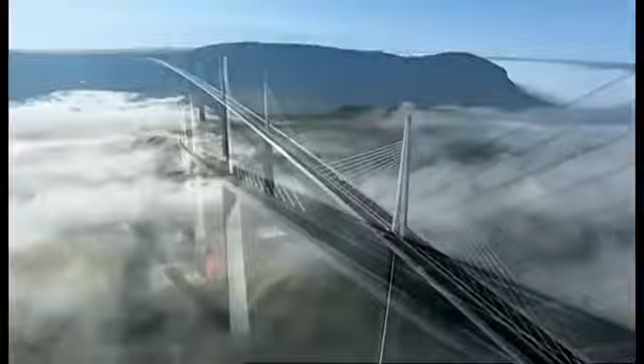This is the Millau Viaduct, the tallest bridge in the world. Its highest tower stretches a staggering 343 meters. So high, the bridge glides above the clouds. But this is a megastructure they said couldn't be built. When I first showed the drawing of this bridge, they really thought I was crazy.

The team attempting to build this amazing freeway in the sky had to survive landslides, fight winds gusting at 130 kilometers an hour, and weather massive storms as the bridge simply hung in the balance. It's a bridge that pushes the boundaries of engineering to the limits, and then beyond.

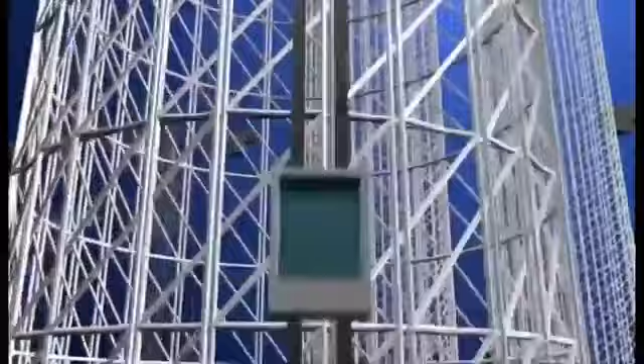Imagine building a series of Eiffel Towers, then slinging a 4-lane highway between them, all the way across one of the deepest valleys in France. Impossible though it sounds, that pretty much describes the building of the Millau Viaduct.

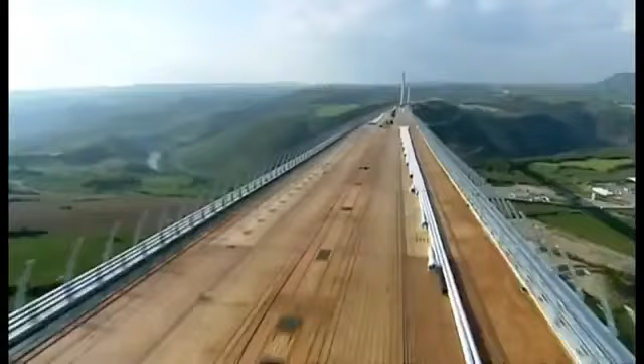From the start, the construction team faced 3 daunting challenges. 1. Build the tallest bridge piers in the world. 2. Put a 36,000-ton freeway on top of them. And 3. Erect 7 steel pylons, each weighing 700 tons.

And what's more, they had to do this hundreds of meters above solid ground. So high that if you were on top of the Eiffel Tower, you'd still be looking up at this awesome bridge.

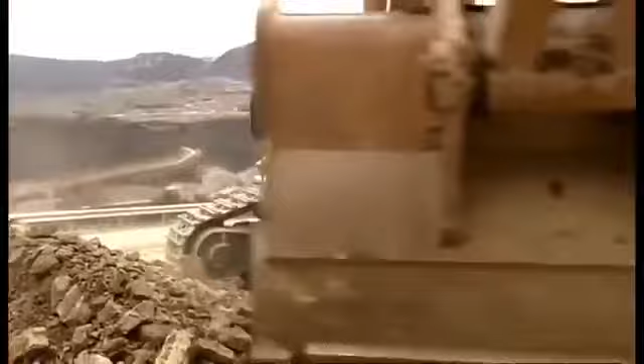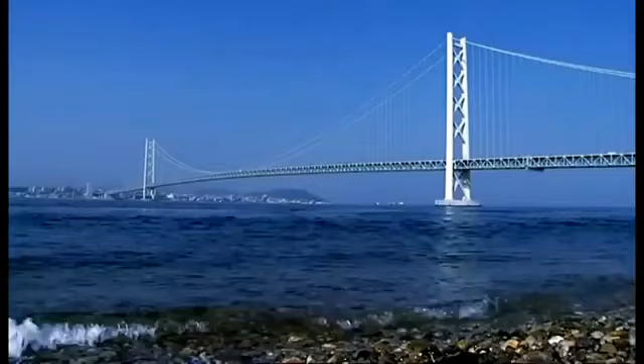October 2001, the team break ground. They're required to build a bridge that'll last for 120 years. And to win the contract, the team promised to build it in record time, less than 4 years. By comparison, the world's longest suspension bridge, the Akashi Kaikyo in Japan, took a full 10 years to build.

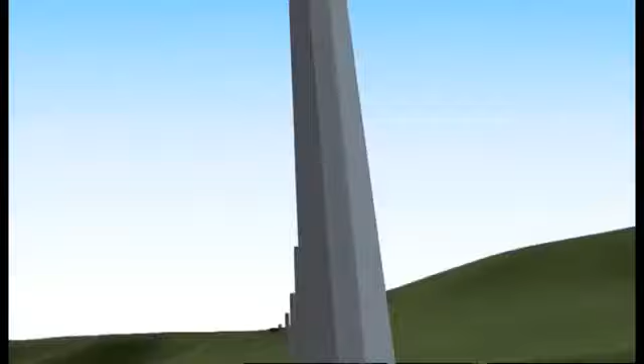To up the ante, any delay will cost them $30,000 a day in penalties. There are 7 piers that are numbered from the northern end of the valley. Number 1 will pose problems because of the steep slope. Number 2 will be the biggest challenge since it's the tallest. Crossing the river, number 3 is not much shorter. Then 4, 5, 6, and 7 climb the gentler slope to the south.

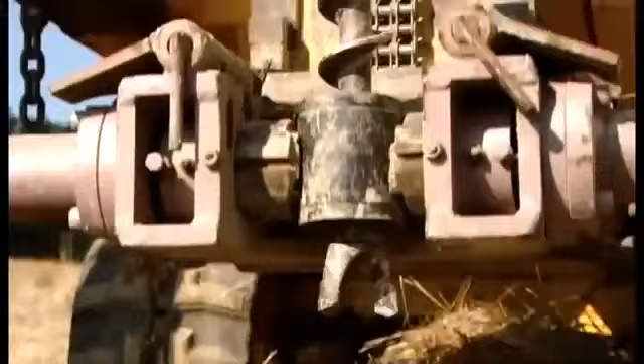To begin, the team had to bury the foundations deep in the bedrock in order to support the enormous weight the bridge will place on them. But the forces of nature were stacked against them. Geologists have warned of the risks posed by the region's fractured limestone. The rock is full of cavities that are essential to the local cheese economy.

These cave systems, close to Millau, are home to a unique bacteria responsible for the blue mold in the world-famous Roquefort cheese. But what's perfect for cheese could be disastrous for a megastructure. The geologist's diagnosis spelt one thing: landslides. This kind of catastrophe could jeopardize the entire project. Despite the warnings, building went ahead as planned.

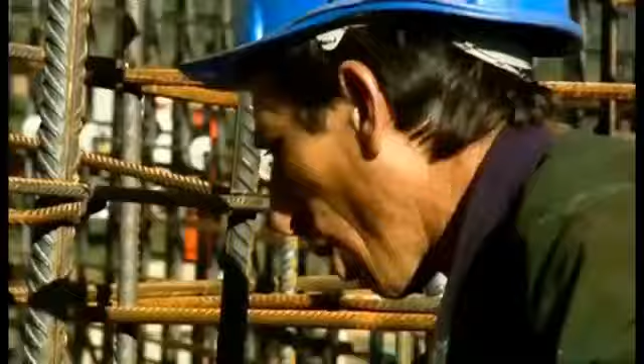Then, well into construction, as predicted, a dramatic storm causes a landslide. 4,000 cubic meters of rock collapse around Pier 1. Fortunately, the fallen rock doesn't damage the pier, but the warning is clear. They're forced to divert precious manpower and equipment to stabilize the slope and prevent a repeat collapse.

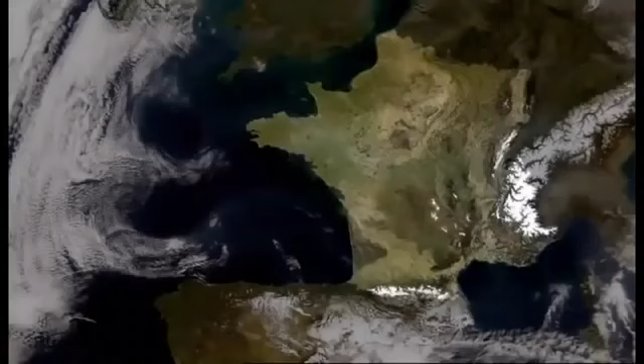So if the area is prone to landslides, why did they build the world's tallest bridge here in the first place? The answer is simple. In the 1980s, France built a freeway linking Paris directly with Spain. This major artery headed south across the French countryside, while from the Mediterranean, the freeway headed north, until they both hit one of the deepest valleys in France and stopped dead.

Welcome to Millau, France's least favorite bottleneck. The town of Millau is in the mountainous region of the Massif Central, one of the most tranquil parts of France. But in summer, this poor medieval town suffered traffic hell. The locals couldn't take it anymore. Neither could their mayor.

It was terrible for our reputation. When you hear every day on the television and radio, avoid Millau, there's a traffic backup, a 5-hour wait in Millau.

And it's not just the people of Millau. Two drivers, crossing the 30-odd kilometers between the freeway on either side of Millau, reveal exactly why this bridge is needed. The driver in car 33 will cross the new bridge, while in car 22, the other will take the old road across the valley floor.

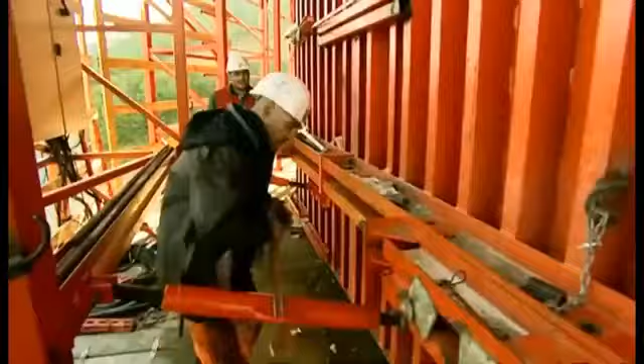The Millau Bridge would not only be the world's tallest, it would be unlike any bridge ever constructed. When I first showed the drawing of this bridge to the authorities, they really thought I was crazy. Virlogeux's Normandy Bridge has 2 sets of cables supporting the deck. But he wanted to up the stakes for Millau by losing 1 row of cables, so the remaining line would be forced to do twice the work.

More dramatically, the 2.5-kilometer Millau Bridge, instead of having a single main span, needed a whole series of piers to support it across the valley. No bridge builders had ever attempted a multiple-span, single-line cable-stay bridge on this scale before. The French authorities had a problem. Nervous about Virlogeux's groundbreaking scheme, they held a competition inviting other engineers and architects to compete with different designs.

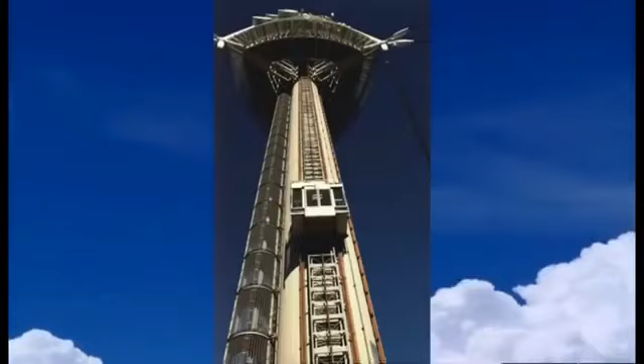The winner, Lord Norman Foster, is one of the world's superstar architects. In Hong Kong, he built the world's largest airport terminal. In Barcelona, offices literally hang from a mast on his communications tower. This is a man who regularly contemplates the impossible and delivers. You know, it's the challenges, and it's one challenge on top of another, on top of another.

And with Millau, one of the biggest challenges was making it fit into the landscape, given it's just down the road from the famous Gorges du Tarn, France's equivalent of the Grand Canyon. How do you make something which has to be so immensely strong against the forces of nature look very gentle, very delicate? How do you weave something on that scale into the most unbelievable landscape?

Ironically, Foster's answer was to take Virlogeux's pioneering scheme, then push it one stage further. He turned an elegant piece of engineering into a delicate work of art by boldly cutting out 2 of the 9 original piers and seriously slimming down the remaining piers and road deck. Foster wanted the bridge to appear as delicate as a butterfly, but this butterfly has to support the weight of 5 Eiffel Towers in gale-force winds hundreds of meters above the River Tarn. Getting the design wrong would be a disaster.

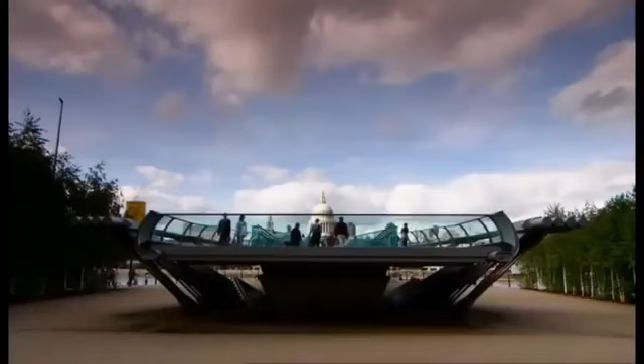Then, with Millau still on the drawing board, Foster's record as a bridge builder suffered a major setback. His Millennium Bridge in London is actually another record-breaking structure, the lowest profile suspension bridge in the world. But when this footbridge opened to the public in June 2000, it was a public relations disaster. Crowds walking over it set up a resonant frequency, and the bridge began to sway. As people adjusted their step to the small initial wobble, the effect was magnified.

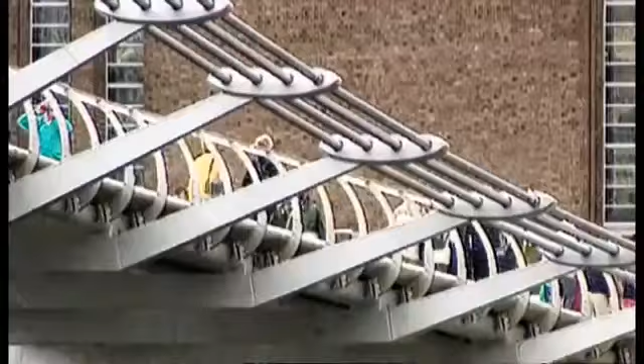Though it didn't threaten the structure, the swinging motion became so dramatic, the authorities closed the bridge for a refit that took 1.5 years and ended up costing over $8 million. It was a bad omen for the Millau Bridge, where construction was soon to begin. And at 15 times the height, a design flaw would be a catastrophe.

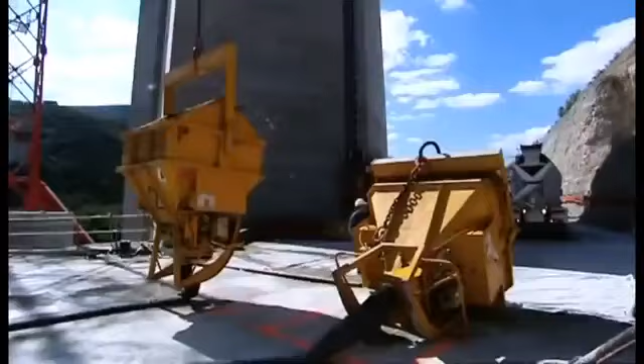December 2001, France's Millau Viaduct, the tallest bridge in the world, is under construction. Everything about this project is supersized. It'll need 200,000 tons of concrete, so much that the team have to build a concrete factory on site. But there's nothing straightforward about this concrete. The formula must be just right. It needs structural strength to support the massive loads it'll have to bear. But it can't set too quickly, as it has to be hoisted into position and poured hundreds of meters in the air. And it needs to be just the right color to suit Norman Foster's vision.

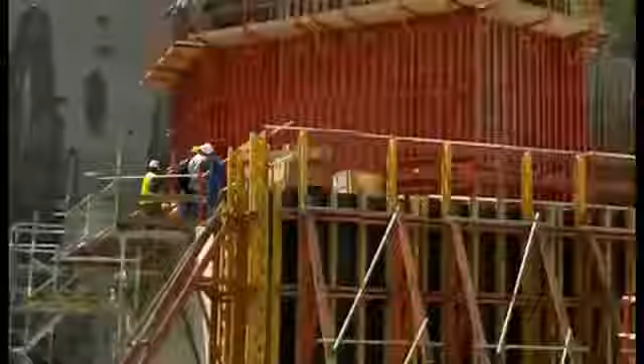In fact, the architect's vision has created a headache for the construction team. He's designed each pier as a complicated geometric shape, tapering the entire way up with vertical grooves set into them to create shadows. But what's just a line on paper for the architect was a major challenge to build. The enormous piers are built step by step by pouring concrete into a temporary mold.

To give the required strength, the molds are filled with a frame of steel reinforcing bars. In total, 16,000 tons of these steel bars are hoisted into place and secured. Laid end to end, they'd stretch the 4,000 kilometers from Millau all the way to Central Africa.

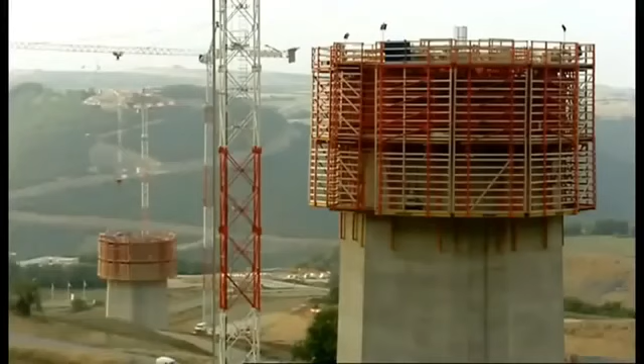The shape of each pier is seriously complicated. As a result, each time they remove the sections of red steel shuttering, they have to change the shape of the mold to fit the profile of the next 4-meter section. Manhandling these steel panels, weighing up to 15 tons apiece, is no picnic. And with the combined height of the 7 piers totaling well over 1 kilometer, they have to change the shape of the mold over 250 times.

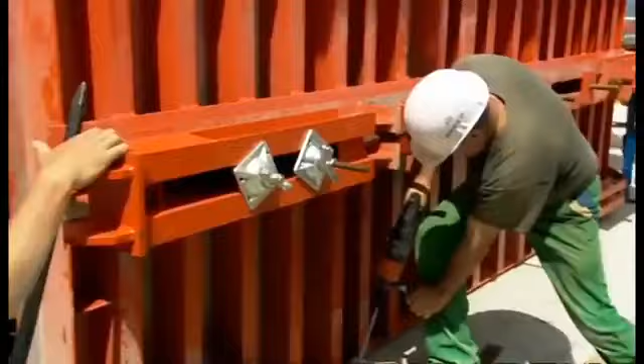Every 3 days, each team on each pier went through this whole cycle. Then they repeated the process. But it was a race against time, with a permanent threat of delay. Keeping the entire build on time and to budget was the daunting responsibility of one man, Jean-Pierre Martin.

If instead of 3 days we took 4, imagine that multiplied by the number of castings. We'd end up with a 3 or 6 month delay. With a penalty of nearly $1 million a month, this isn't something Martin wanted to contemplate. And this schedule wasn't his only headache.

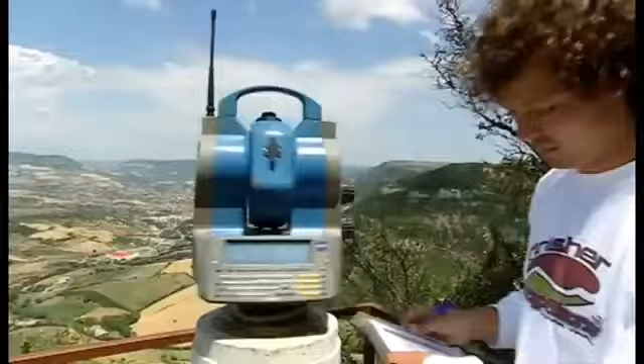You have to be pinpoint accurate when you're building the tallest bridge piers in the world. Get it wrong, and the bridge simply won't fit together. Just 10 centimeters out, about a hand's width on each 4-meter section, and the tallest pier could be 6 meters off at the top, the width of a jumbo jet fuselage.

Each team was aiming for a specific point in the sky. For Pier 2, this was exactly 245 meters above the ground, 546 meters from the north side, and 1,914 meters from the southern end. There was no room for error.

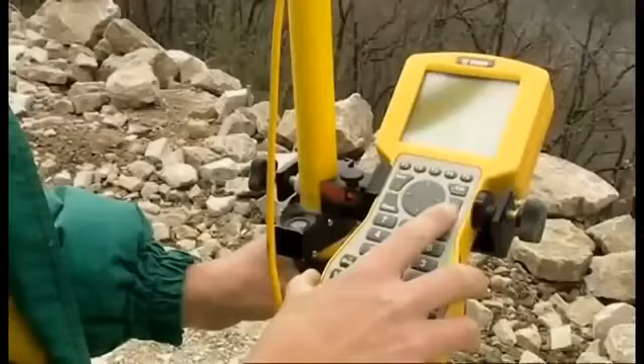The only chance they had to get it right was with GPS, accurate to within 4 millimeters. Using signals from multiple satellites, the team could pinpoint their position and make sure they're on target for that critical point in the sky they needed to hit.

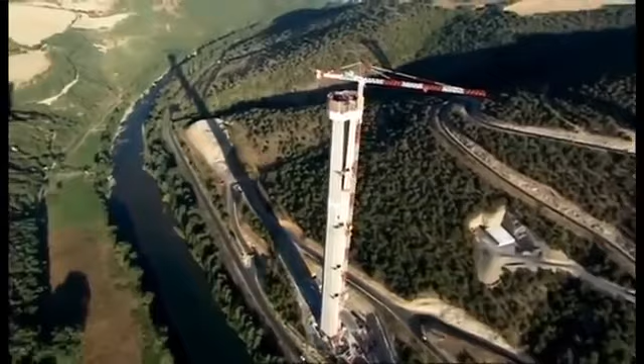Month after month, the piers climbed higher. Finally, by November 2003, they reached their full height. At 245 meters, Pier 2 becomes the highest bridge pier in the world. But is this record-breaking pillar where it's supposed to be? Amazingly, it's dead on target, to within 2 centimeters. Champagne corks pop. It's time for a major celebration.

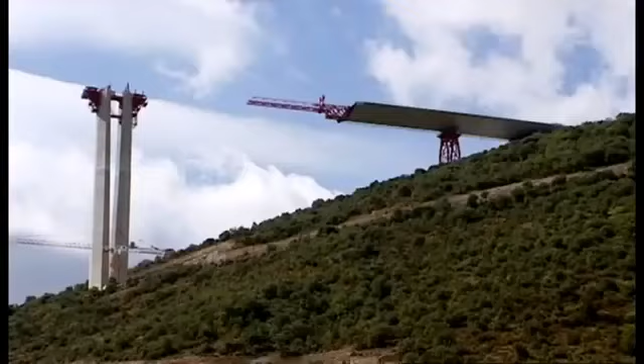Against all the odds, they were 1 month ahead of schedule, but the team couldn't afford to relax. The next stage of the project would be the most difficult part of the build. Phase 2 of building the world's tallest bridge involved putting a 2.5-kilometer roadway weighing 36,000 tons on top of the piers, a full 270 meters above the River Tarn.

Bridge builders know danger comes with the territory, but working at these heights can be lethal. More than 34 died constructing New York's Brooklyn Bridge. 35 died in 1970 on the Westgate Bridge in Melbourne, Australia. And 1 year later, 13 workers were killed when the Koblenz Bridge in Germany collapsed into the Rhine.

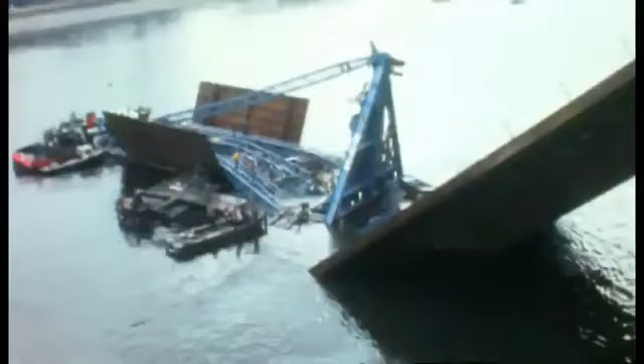With these fatalities in mind, the team decided to fabricate the entire road deck on the safety of solid ground. This meant building it in steel, which in theory would be much safer than lifting vast concrete sections hundreds of meters into position. There's only one problem with this plan. No one had ever put a road deck on piers anything like this height before, let alone over a 2.5-kilometer span.

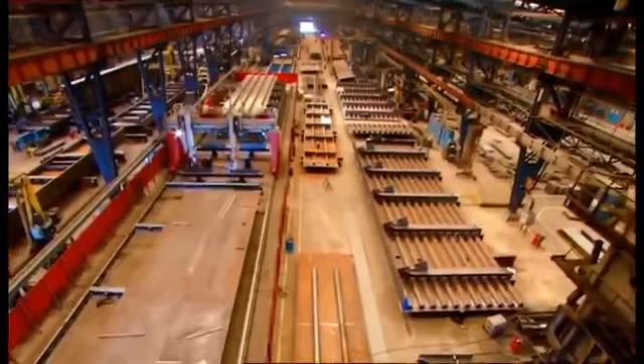In the end, only one steel manufacturer had the courage to take on this colossal challenge. Eiffel, the steel firm set up by the great French engineer. Eiffel built what was once the tallest bridge in the world, the Garabit Viaduct in southern France, before getting round to the framing for New York's Statue of Liberty and, of course, his signature tower in Paris.

But despite the company's experience, Eiffel's director, Marc Buonomo, knew he was taking a serious risk. It was a gamble for the company, because if there had been a mistake, if it hadn't worked, it would have been the whole company.

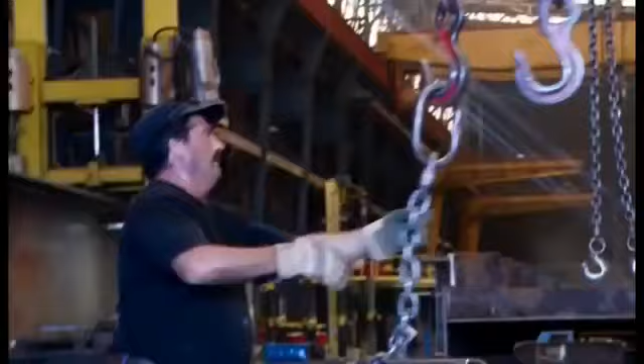They fabricated the massive sections that would make up the road deck in the company's steel factories. This immense jigsaw puzzle involved manufacturing 2,200 separate sections, weighing up to 90 tons, and some of them 22 meters long. Their accuracy is measured with a laser to within a fraction of a millimeter.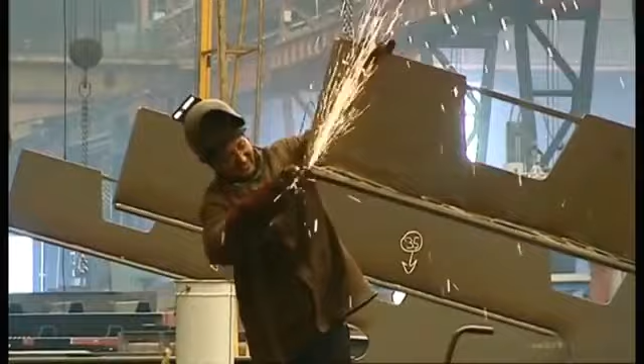The huge square tubes are the central spine that should make the deck rigid. The triangular side panels will be welded on either side to create the width for a 4-lane highway. To meet the punishing schedule, Buonomo automated the manufacturing with a 2-headed welding robot and a plasma cutting machine.

Each cutting pattern or template is programmed into the computer. Then the machine automatically blazes its way through the steel. The torch reaches a scorching 28,000 degrees centigrade. That's 5 times the temperature of the Earth's inner core. But cutting and welding was the easy part.

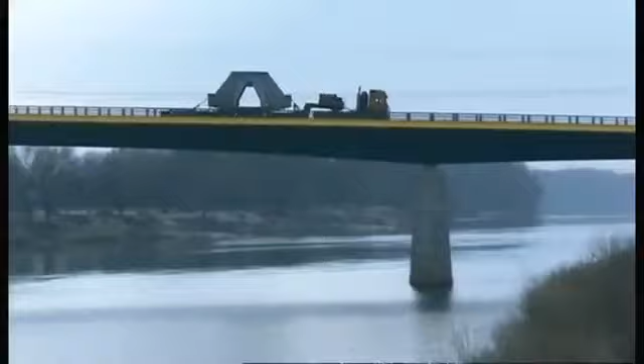The hard part was getting these monster sections the hundreds of kilometers from the factories to Millau. The routes had to be planned with precision to avoid major damage. The police coordinated safety and clearances. Even with that level of preparation, some obstacles felt as if they're cutting it just too close for comfort. And this was no one-off event. To build the viaduct took over 2,000 of these extraordinary road convoys.

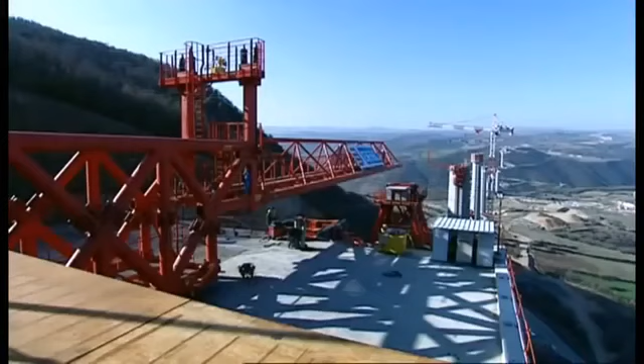The components arrived at assembly plants set up, one on either side of the valley. Here, the pieces of a massive jigsaw puzzle were welded together to form the 2 halves of the deck. But getting these 2 halves to span the valley on top of the world's tallest bridge piers would be a major challenge. They'd be the first team to put a road deck on a pier taller than an 80-story skyscraper.

And pushing bridge building beyond anything attempted before, they planned to slide the entire 2.5-kilometer road deck over in 2 colossal pieces. The bridge's chief engineer, Jean-Marie Cremer, was one of the few people who believed it could be done. All the engineers who know this method, who were in the know, didn't believe it was possible. If the team had got their calculations wrong, the entire structure could collapse into the valley.

We found a solution for the construction, which was to launch the bridge from the 2 sides. One part on the Larzac Plateau, one on the Rouge Plateau. And to push them from the 2 sides and to make them come and meet here above the River Tarn.

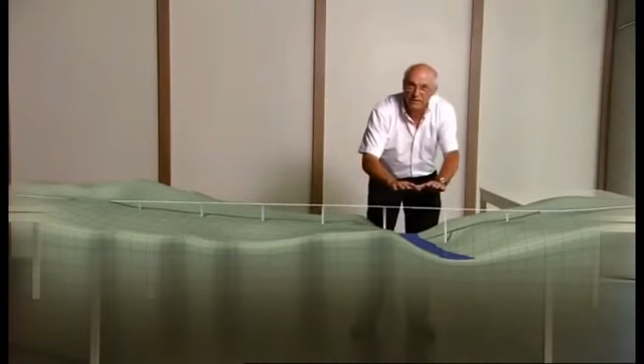Smaller bridges use a similar technique. A powerful set of hydraulic rams literally pumps the deck from one side to the other. But Millau would be the longest launch ever attempted over the highest piers in the world, and the results could spell disaster. The deck is so slender, it would bend and collapse if it were pushed out over the 342-meter spans between each pier. The furthest anyone's previously managed is less than half that distance.

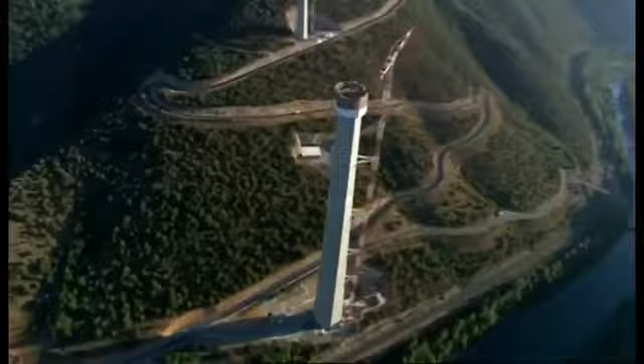The first part of the solution was simple. Fit a pylon so its cables support the front of the deck as it goes out over the valley. Then construct temporary steel support towers that halve the spans to a more manageable 171 meters. These steel towers were a construction feat in themselves. The largest, over 170 meters high, is the tallest ever built, and they needed to carry a massive load.

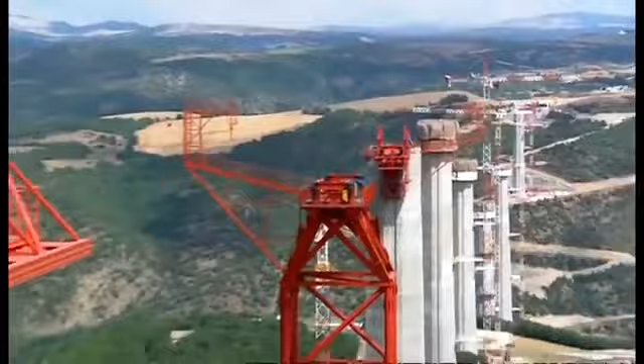7,000 tons as the leading edge of the deck, together with the first 90-meter pylon, slide over. And simply pushing this enormous weight over the top of the vulnerable piers would bring them crashing to the ground. This was the nightmare scenario. If we'd done a conventional launch, we would have knocked the piers over like the pins in a bowling alley.

Someone needed to reinvent the way this type of bridge is built. And it's Marc Buonomo with Jean-Marie Cremer who came up with the breakthrough. The basic principle can be demonstrated with a heavy box and a wobbly table. With a normal launch, you knock over the piers. I want to advance the deck over the pier, but if I push the deck from here, I'd knock over the piers, because they're so tall.

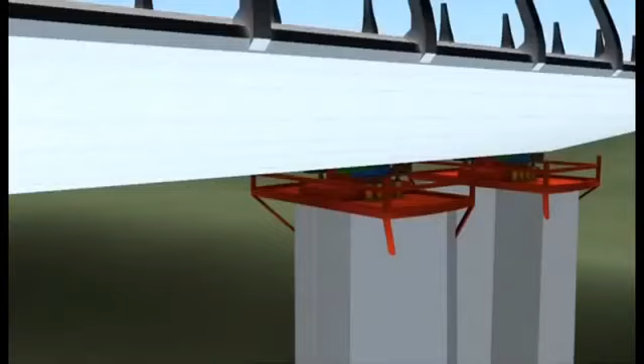The idea is to install a launching system on top of the pier, and that way, if I push the deck, it has no effect on the stability of the piers, and the piers won't fall over. The trick is to use a series of these launching systems to jack up the deck and inch it forward. Each system uses two wedge-shaped blocks under each side of the deck. The upper wedge is pulled forward by a hydraulic ram.

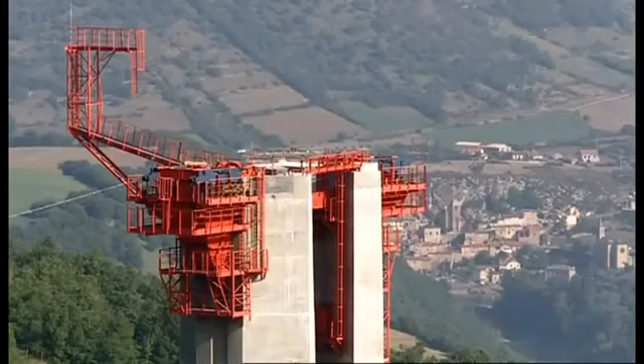It slides up the slope of the lower wedge at the same time, lifting the deck from its supports and advancing it 600 millimeters. The lower wedge then retracts, dropping the deck onto its supports. The upper wedge returns to its original position, and the whole cycle begins again. 4 of these clever devices are placed on each pier, all programmed to work at exactly the same time. The result is that together, they pick up the entire roadway and shunt it forward.

But if one fails or gets out of step, it could spell disaster. The force could push the bridge piers apart till they collapse. When you're up there and you see Millau 300 meters below you, you ask yourself, was this a good idea? The future of the entire project was now hanging on a prototype, and it had never been tested.

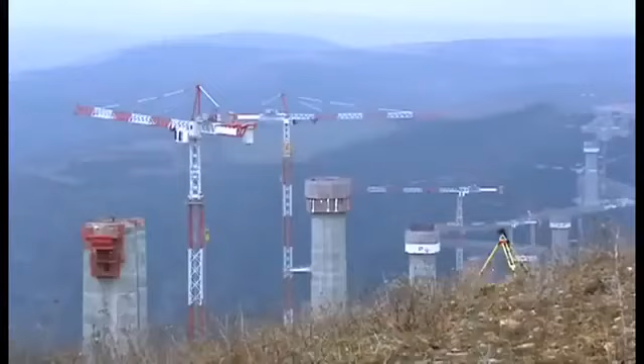It's the morning of February 26, 2003. Do or die day for the world's tallest bridge. Everything is about to be put to the test. The flexibility of the deck, the strength of the temporary piers, and critically, the pioneering hydraulic ram system. Even Buonomo, the man in charge of the launch, had his doubts. As it had never been done before, I have to tell you, I had fears that it wouldn't work.

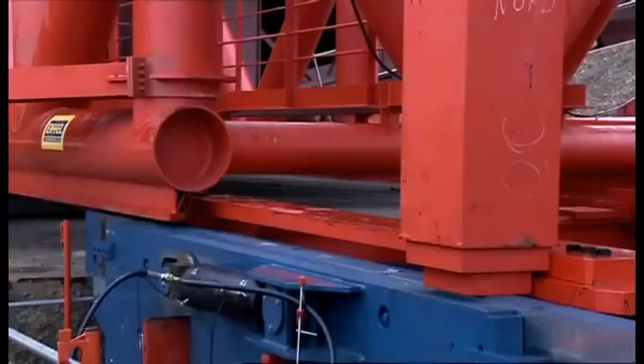The pumps kick in, the pistons start to push, and the deck begins its huge journey across the valley. The moment I heard the motors start, I put my finger on the deck, and I could feel my finger move. Every 4 minutes, the deck advanced 600 millimeters across the valley. Surveyors tracked its progress. But it was still a nail-biting time as they watched the unsupported deck crossing the void.

Eventually, the deck reached the safety of the first pier. 204 meters down, only 2,256 to go. The launching system seemed to be working as planned. The engineers were feeling optimistic.

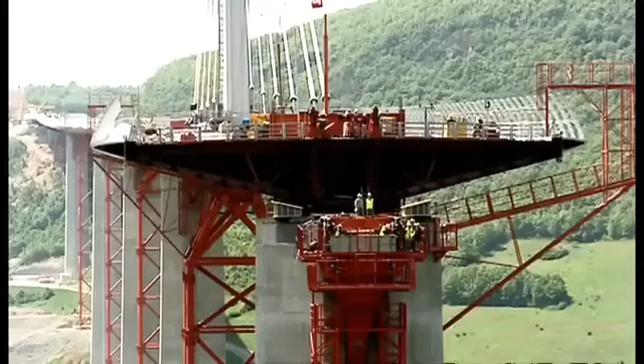But as the deck advances into space, it'll become more vulnerable to the wind, which can reach 130 kilometers an hour. Unfortunately, the road deck has the shape of an upside-down airplane wing, and the team's greatest fear is that this wing could simply take off.

The engineers kept a close eye on the wind and weather conditions. When they were satisfied there was a 3-day weather window and the wind wouldn't exceed 85 kilometers an hour, they'd give the construction team the go-ahead, and the deck launch could continue. The reason for this precaution is simple. Strong winds can literally tear a bridge apart.

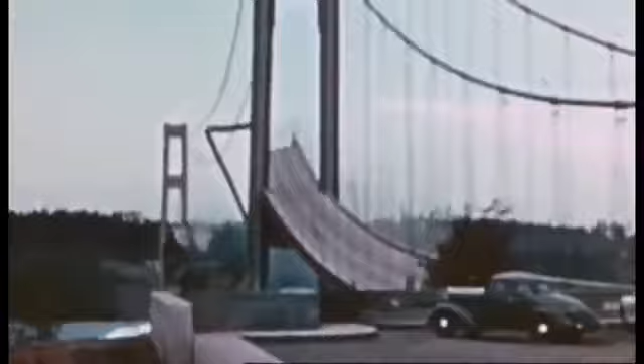In 1940, Washington State built a suspension bridge across the Tacoma Narrows in the US Northwest. It opened with a grand ceremony on July the 1st. But the celebrations were short-lived. The bridge had a major problem: the wind. Girders beneath the deck, designed to make the bridge rigid, actually blocked the wind, causing the roadway to ripple alarmingly. Locals soon dubbed it Galloping Gertie.

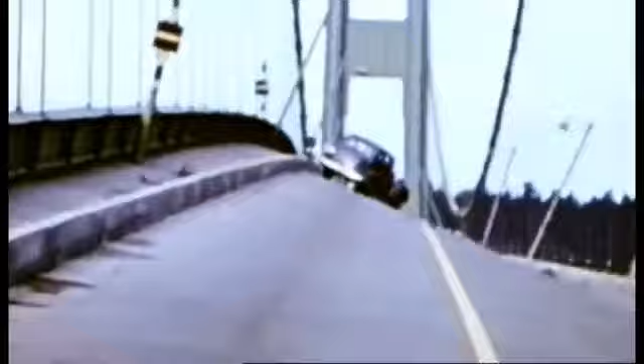On the 7th of November, with the wind less than 70 kilometers an hour, the bridge begins to twist violently. At 11 a.m., time runs out for Galloping Gertie. The wind sends the bridge crashing into the river.

Wind tunnel testing is now standard procedure as a direct result of Galloping Gertie. For the Millau Bridge, they analyzed the wind in the Tarn Valley over 18 months, then recreated those conditions in the wind tunnel. Wind engineer Olivier Flamand was shocked by the results. The average wind speed was relatively low, but because there's such strong turbulence, it created very fast peak winds.

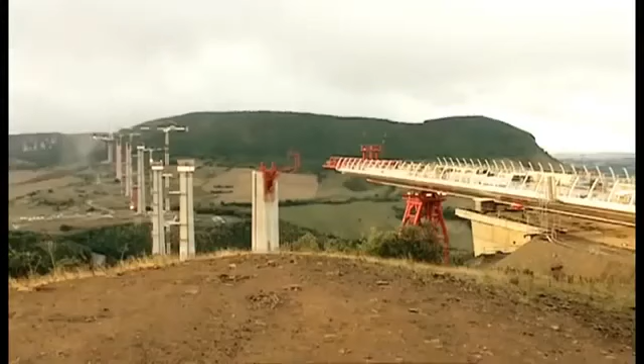The rugged terrain creates serious turbulence at the height of the road deck. Winds peak at 130 kilometers per hour. That's hurricane force. They tested every aspect of the bridge to analyze the risks: piers, pylons, and critically the deck. But it's not just the aerodynamics of the finished bridge. They needed to find out how it would behave when it was most at risk, during the launching of the deck.

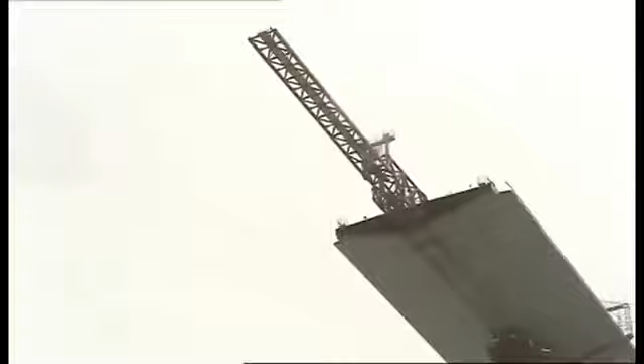Olivier and his team reached a chilling conclusion. The winds they've measured are strong enough to blow the unsecured deck off its supports and send it crashing hundreds of feet to the valley floor. And then the nightmare began. On the 22nd of August 2003, 6 months into the deck launch, one of the launch systems failed, leaving the deck hanging in the wind. To make matters worse, the weathermen were predicting storms.

So far, these massive pumping machines had worked perfectly. But the fact is they were prototypes, and due to the frantic schedule, they'd never been tested. The problem was that the non-stick Teflon between the sliding surfaces had ripped, and the friction generated was too much for the hydraulic rams to push against.

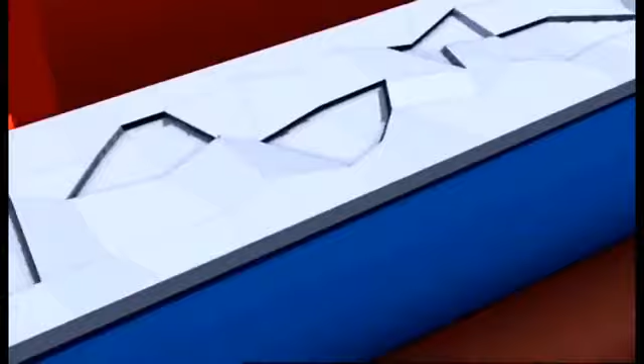Unfortunately, no one had planned on replacing parts of this monster machine mid-launch on the top of a massive concrete pillar. This was very bad news for the man who staked his reputation on this system. It was maximum stress, like poison in your mouth. You don't forget that.

Re-examining their calculations, they realized the cause of the problem. They'd underestimated the forces between sliding surfaces, but they wouldn't be able to repair it without the necessary spare parts. The clock was ticking, and Marc Buonomo needed a solution fast. When Apollo 13 came back with that incident, the NASA engineers requested they did the inventory of everything there was on board to know how to fix it.

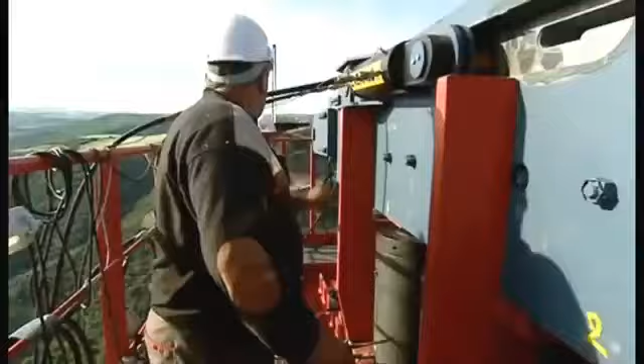The Millau team did an inventory. They realized that the other launching machines, not yet being used, could be stripped to provide the new Teflon surfaces they needed. Working all through the night, the team extended the access platform. This allowed them to take out the 5-meter-long, 2-ton steel wedges, replace the Teflon, and reassemble the launching machine. By 8 a.m. the next morning, it was ready to resume the launch.

The rest of the week, the predicted storms arrived, and another set of launching machines wore out. So when the deck finally made it to the safety of the next pier, the team breathed a major sigh of relief. You don't forget that. I won't forget that for 4 hours I was really scared.

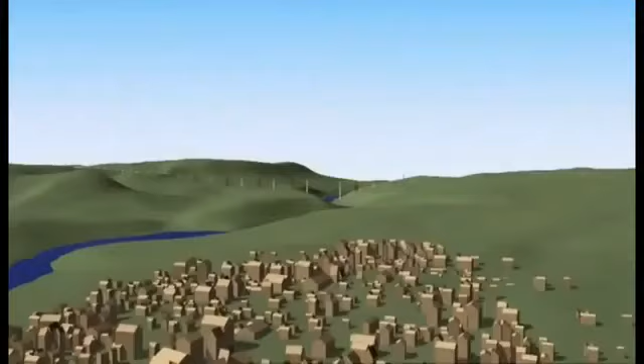The two decks continued their journey across the valley, day after day, week after week for a full 14 months. They approached each other, millimeter by millimeter. By May 2004, they'd reached a critical phase. From the northern end, the shorter deck had traveled 717 meters into space to reach its final resting place. From the south, the longer deck extended over 1.5 kilometers. Only the section over the river, the one point where it was impossible to erect a temporary pier, divided them.

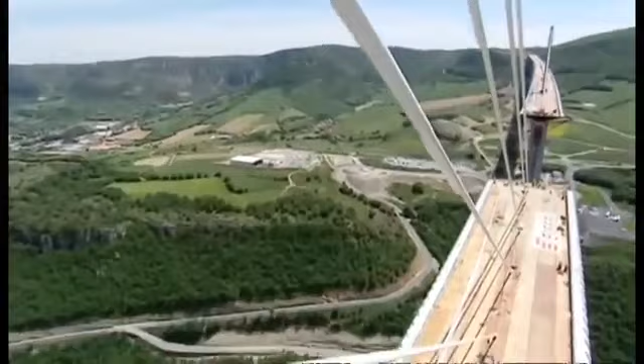But would they meet as planned? If they've got their calculations wrong, they'll have built the biggest white elephant in Europe. Even the man behind the whole project had his doubts. I was not convinced at all that the two parts of the deck could meet exactly with a perfect geometry.

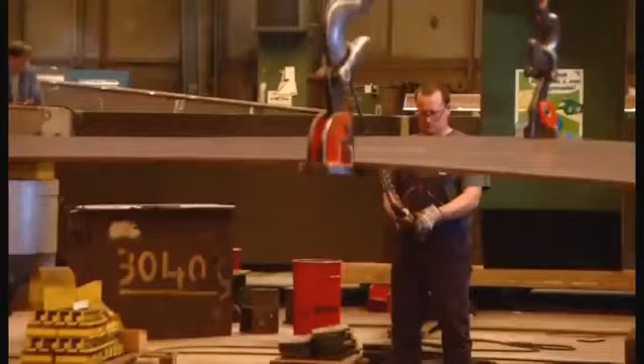The odds were against them. Calculating such a feat so precisely is a Herculean task. Firstly, the two starting points on the northern and southern slopes of the valley are at different heights. Secondly, the bridge has a subtle curve to it. As a result, each steel panel which makes up the road deck had to be cut and welded with extreme precision. It would be an engineering triumph if they got these two sloping curved decks to meet as required.

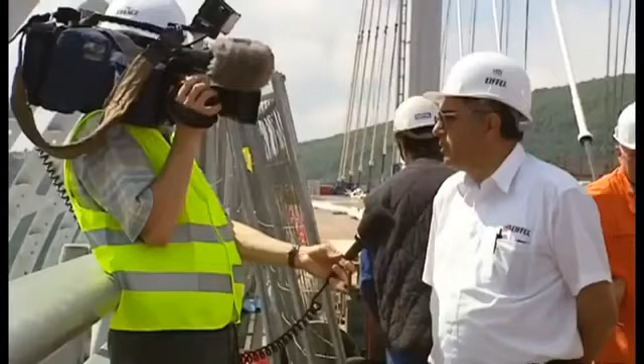The team checked the weather reports. With the wind inside safety limits, they gave the go-ahead for the final push. The rams began to drive the deck's leading edge off the safety of Pier 3 towards its destination. At this point, a total of 21 launching systems needed to move at exactly the same moment to avoid disaster. If anything were to go wrong now, the man responsible would be Marc Buonomo.

Everyone asked me, how can you be sure that it will go straight? So to be sure that they were going to the right place, I had a GPS put on the front, so I could see the gap between the theoretical and the real position. Over the next 2 days and nights, the deck advances 600 millimeters at a time towards its final resting place. The world's media are watching the critical meeting of the decks, and to add to the pressure, the French Prime Minister is due to drop in to celebrate the event.

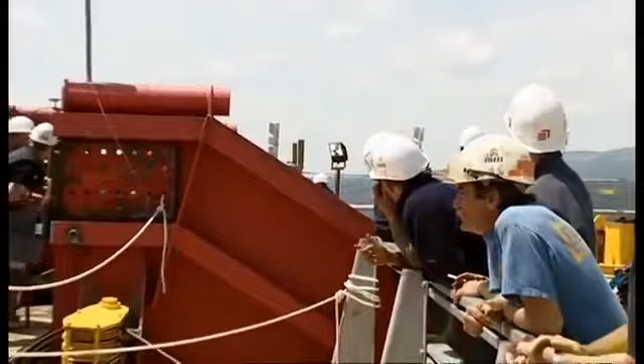The deck pushes forward, now with only centimeters separating the two sections. A magnum of champagne is hung between them to mark the moment. At last, union. The two massive steel decks have traveled high over this valley, a total of 2.5 kilometers, and when they check, they're aligned to within 1 centimeter. That's accurate to within 99.9999%. All the measuring, all the calculations have paid off. They've nailed it.

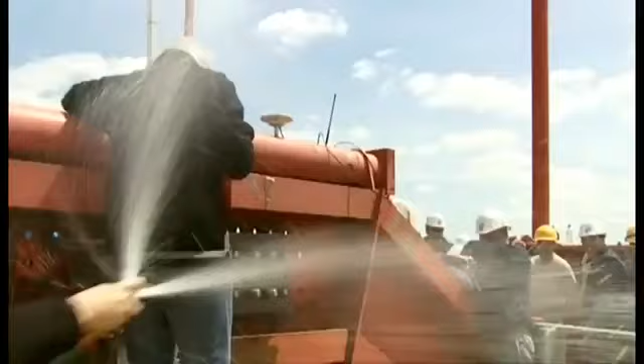The meeting of the decks was a special moment. News reports traveled round the world, and in Salzburg, Austria, they reached Felix Baumgartner, aka Fearless Felix. Felix has made a career base jumping from some of the tallest structures on the planet, and within 24 hours, he'd driven to Millau and was calculating the logistics for the jump, factoring in his two main aims, to avoid arrest and death.

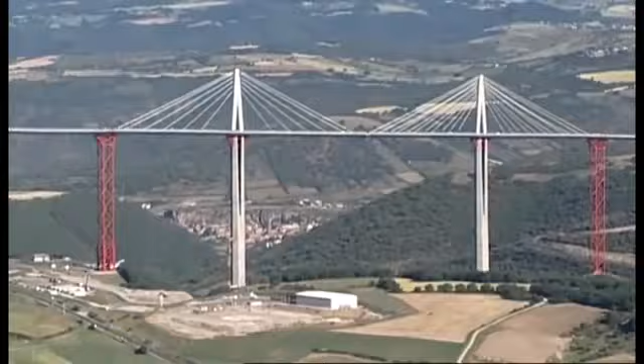Baumgartner waited for darkness before arriving on site. He found his way to the base of Pier 2, then climbed an access ladder the full 245 meters to the top. He entered the steel road deck and found a place to hide until daybreak. He had to remain concealed until the sun was high enough for his cameramen to record his world record attempt.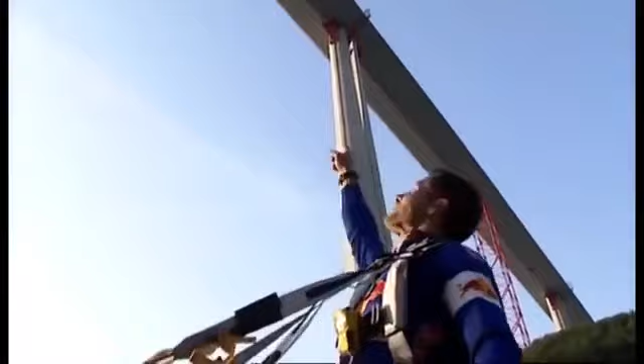At 7 a.m. the following morning, Felix the Conqueror emerged. He took a cool backward flip off the tallest bridge in the world and entered the record books. The tallest bridge in the world, 250 meters. I did it. And having evaded death, he made sure he's not caught by the police.

The decks have been joined, and the team have reached the final phase of the project. But there was still a race to meet the schedule, and their problems weren't over yet. Everyone could see the dramatic undulations in the flexible steel deck. Even some hardened bridge builders wondered about its structural integrity. It was a huge surprise for everyone. All the engineers said, we knew steel was flexible, but not that flexible.

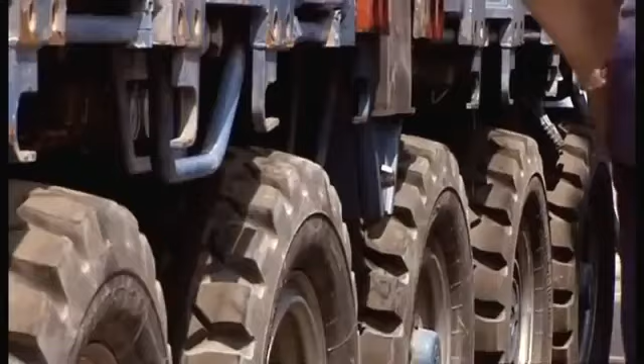The team were relying on the pylons and cables to pull the deck straight. Each massive pylon is 90 meters high and weighs 700 tons, the equivalent of 85 London buses. Placing them in position on the slender deck, high above the valley floor, would go beyond anything ever attempted. Once again, Marc Buonomo had a plan. You know, the first people to make vertical pylons were the Egyptians. Buonomo adapted a technique used in ancient Egypt to erect obelisks in the sands.

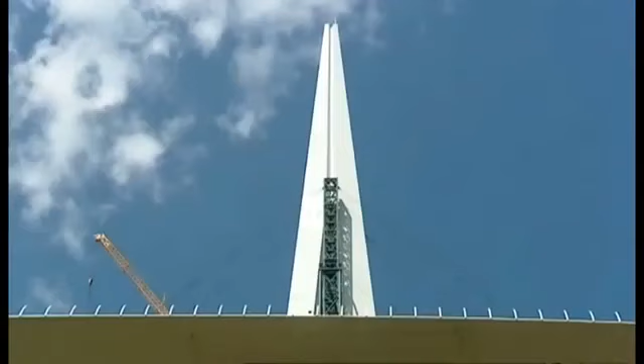On top of the road deck, the team put up two enormous steel towers, both of them secured by cables and equipped with a hydraulic system capable of raising 1,000 tons. The 700-ton pylon is then lifted by the hydraulics. As it rises, it pivots little by little until it's vertical. It's then lowered safely onto its anchorage point. Buonomo's 4,000-year-old technique worked to perfection.

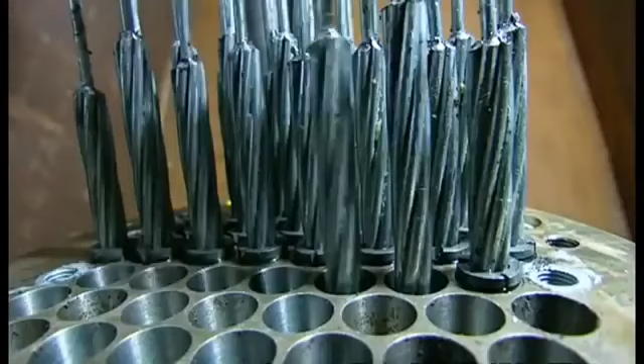With all 7 pylons in place, the team could attach the cable stays that would straighten the rippling deck and give it the strength to cope with full traffic loads. They hoped. The weight of the roadway is now over 40,000 tons, the equivalent of a cruise ship, and the 154 cable stays should prevent it from sagging or collapsing. The strongest stays are made up of 91 individual steel strands and have a breaking strength of 25,000 tons, strong enough to hold back 25 jumbo jets, all at full throttle.

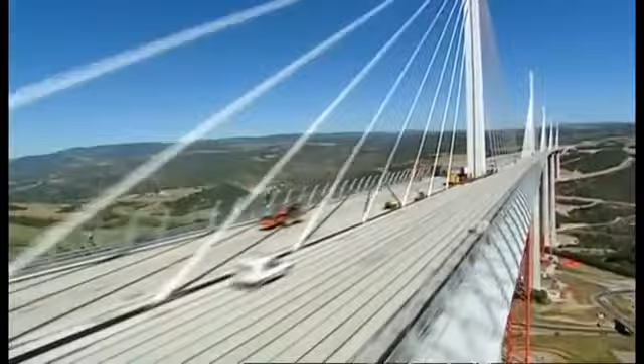As the cable stays are tensioned, true to plan, the ripples in the road deck are pulled straight. Over the 2.5-kilometer deck, the ripples are now no larger than the size of a thumb. They're finally on the home straight. The road surface goes on, adding a further 10,000 tons to the load. That's like driving 153 battle tanks onto the deck. But before it could open to the public, the team needed to know the bridge is safe. It would have to pass one crucial test.

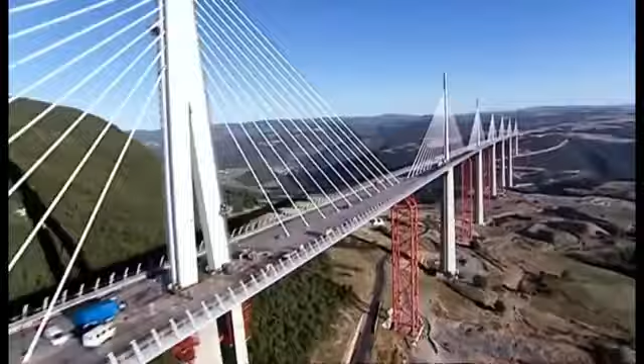After 3 years, the construction team building France's Millau Viaduct, the world's tallest bridge, are about to find out if they got their calculations right. On a single-span cable stay bridge like the Normandy Bridge, a large load on the main section is no problem because the cables are attached to solid ground and can't give.

On the Millau Viaduct, with its 8 spans, the cables are attached to the deck of the adjacent sections. A load on one section will cause it to drop, pulling the stays down. As the pylons lean in, the matching stays are pulled upwards, lifting the neighboring decks and causing a dangerous rippling effect.

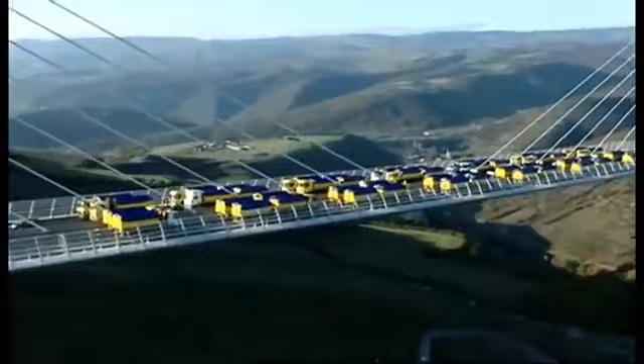It's right now the team put their bridge to the test. These 28 trucks have a combined weight of over 900 tons. They are now positioned in the critical point, mid-span. The engineers hold their breath. Measurements are taken. The span bends just 26 centimeters. This is a triumph for the engineers. The bridge was designed to cope with more than double that.

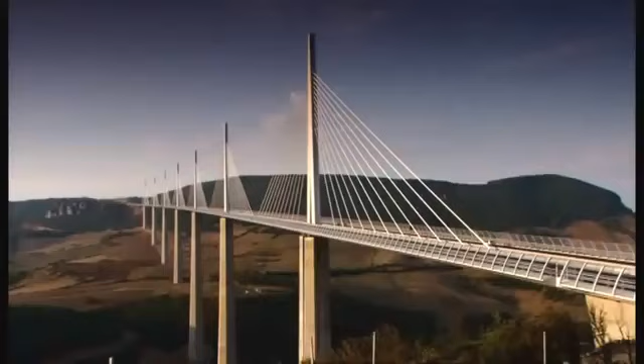4 weeks later, on December the 14th, 2004, President Jacques Chirac officially opened the Millau Bridge. A proud moment for the whole of France. Just over 3 years of construction have produced the tallest bridge in the world, designed to last at least 120 years. And against the odds, the project manager even brought the job in on time. But that's not what he's most proud about. What I remember, because on construction sites there are often accidents, is that we had no serious accidents, nothing more than a minor injury.

As soon as it opened to the public, the bridge was an instant success. But the real test isn't till its first summer, and the French all take their annual vacation. No one ever expected anything like this. Numbers peaked at more than 50,000 vehicles a day. At over $7 per car, that's great news for the construction company, who are clawing back their $478 million investment in the project.

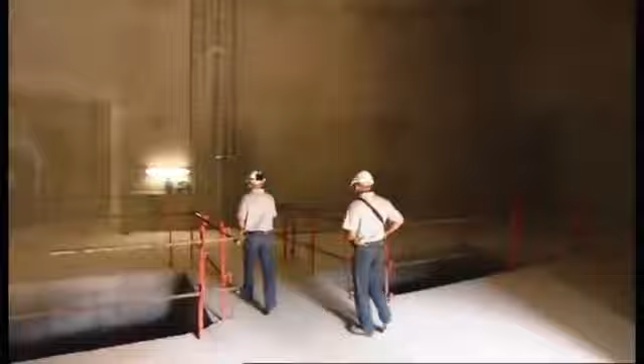This was an epic bridge to build, but it's just as epic to maintain. Thierry and Frank are assigned to P2, the world's tallest bridge pier. This structure is no solid concrete block. It's a series of vast hollow spaces. Their job today is to test the communication system and electric circuits on each of the 7 structural floors. This involves a 343-meter climb, going hand over hand up a ladder for the rest of the day.

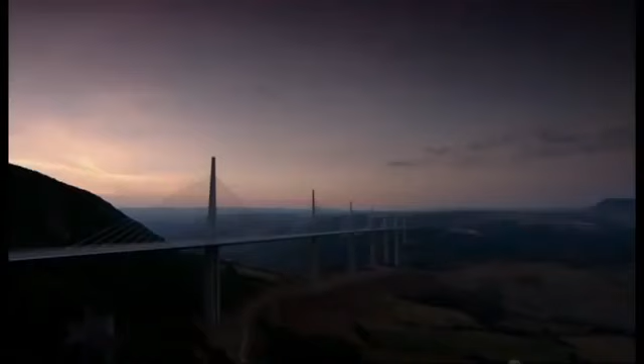By dusk, when Thierry finally reaches the summit of the pylon, he may be exhausted, but there is a payoff. You get a fantastic view from here, a 360-degree panorama. The tallest bridge in the world has become an icon. But this is creating problems no one had ever imagined. Locals have been taking over the bridge as a platform to get media attention for their causes. This crowd was hoping that driving sheep over this freeway in the sky would help them get more farming subsidies.

Jose's job is to prevent this kind of incident from creating a danger, and on this bridge, the incidents keep on happening. An alarm triggered by a motion detection system means there's a stopped vehicle on the bridge. Immediately, Jose dispatches a colleague to deal with the situation. The last thing anyone wants is a multi-car pile-up on a 2.5-kilometer bridge, quarter of a kilometer in the sky.

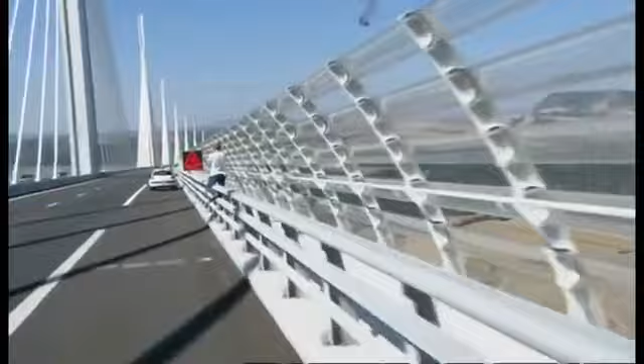Jose zooms in his camera to reveal the man has left his car and is sitting dangerously on the crash barrier. The driver's probably only broken down, but already one man who stopped climbed over the wind barrier and jumped to his death. Bruno intervenes. Thankfully, it's no more than an irresponsible photographer who's sent on his way.

You could say the Millau Bridge is a victim of its own success. It's definitely become a major tourist destination. 700,000 visitors in the first 9 months. Fortunately, most of them wait till they're off the bridge to take their photos. It's magnificent. I came 600 kilometers today to see the Millau Viaduct. There's only one thing to say. It's extraordinary. They're drawn because it's a world-beating structure, but also because it's incredibly beautiful, delicate, and minimal. Not what you'd expect from a structure that's nearly a third taller than any other bridge on the planet.

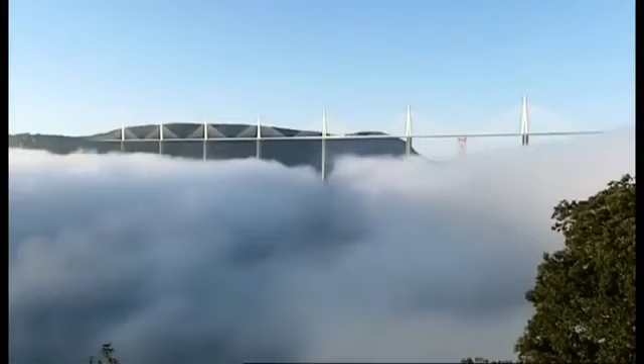And architect Lord Norman Foster's achieved his aim to give the driver the sensation of soaring. As you leave these plateaus, you do fly. You fly across this bridge. Literally, you are above the clouds. And the result certainly pleases the man who dreamt it all up. To see erected this bridge, which I imagined 15 years ago, it's something magic. This is the longest pure cable stay bridge in the world, the tallest roadway in the world, and of course at 343 meters, it is the tallest bridge ever constructed.